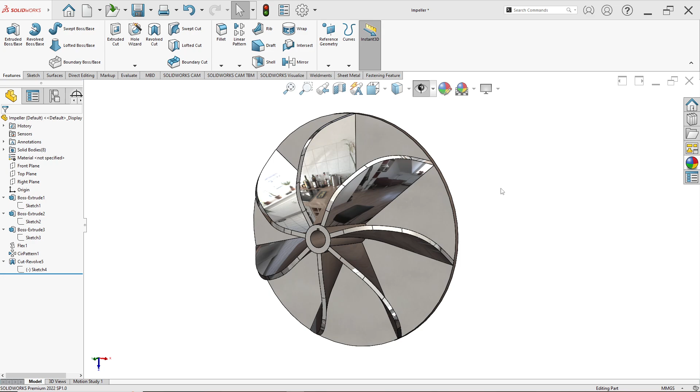In this tutorial we will learn how to design a centrifugal blade impeller like this in SolidWorks. Okay, you can see it like this.

First select here, click New and click Part, click OK. For background we can change plain white to a clear background, white. For unit, select millimeter gram second. After that we start from the top plane.

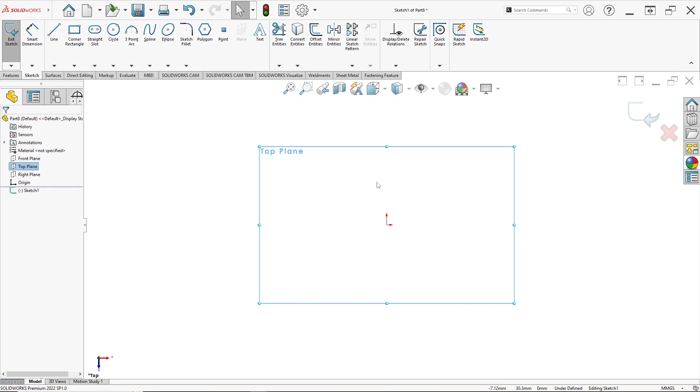Right click on top plane and click Sketch. First select a circle and draw it like this, then set the dimension for the circle. Here I set the diameter of the circle to 200 millimeter, for example.

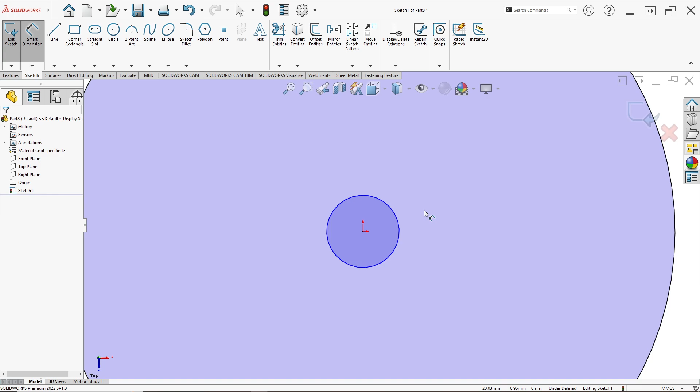Draw another circle in the center and set its dimension to 15 millimeter diameter. Then for the hub, draw a center rectangle from this point to this, with width set to 2 millimeter and distance to center of the part set to 9 millimeter.

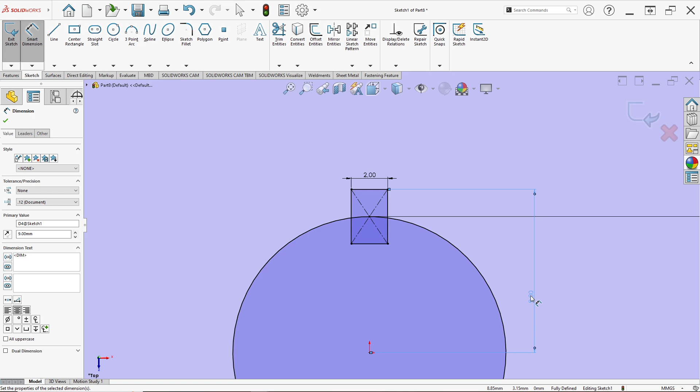It is like a keyway or hub. Just trim entities for this line, this line, this line, this line, and this line like this.

After that, click Feature and click Extrude Boss or Base like this. For direction select Blind, and for depth or thickness I set 4 millimeter like this.

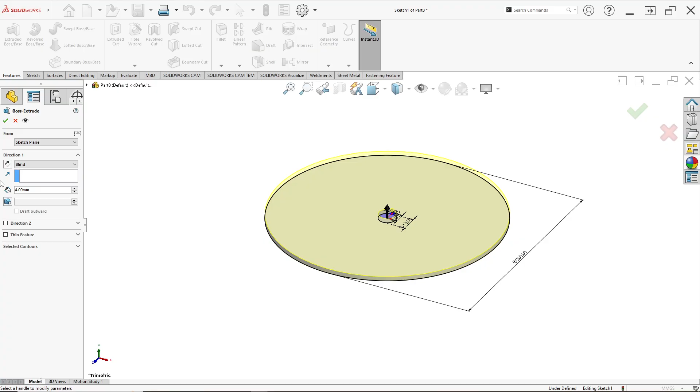Just click OK. After that, right click on this face and click Sketch, and convert entities. Click Convert Entities, and for entities to convert select this edge, this edge, this edge, and this edge.

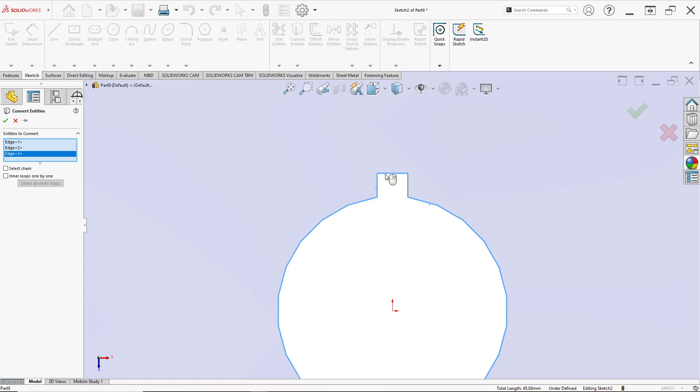Just click OK. After that, make a circle again, draw it like this, and set the dimension of the circle to 25 millimeter, for example.

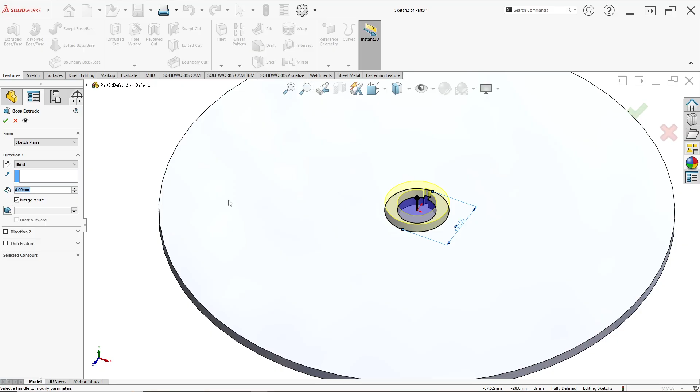After that, click Feature and click Extrude Boss. For depth or thickness here I set 60 millimeter, direction is Blind, so select Blind here and click OK.

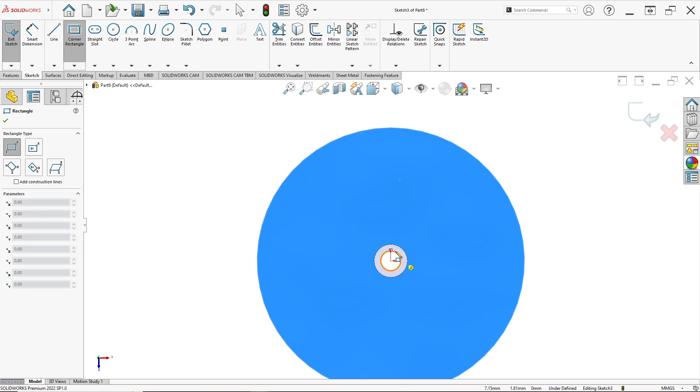It's simple. After that, right click again on this face and click Sketch. Here we start to draw a corner rectangle. Select Corner Rectangle and draw from this to this like that.

Ensure this midpoint and this point, hold Ctrl and click to make vertical like that, and set the width here. For example, I set it to 4 millimeter.

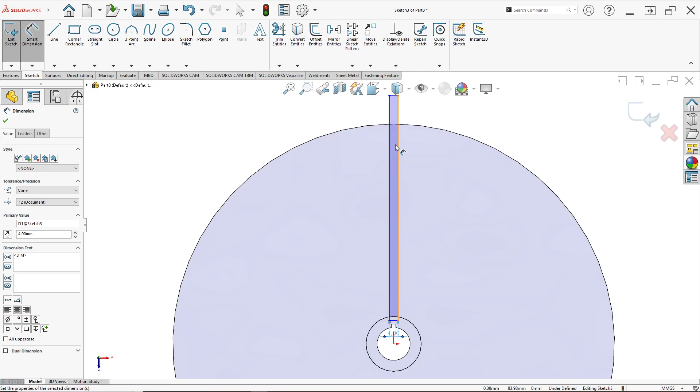Here we make a blade, with thickness set to 4 millimeter. For that, click Convert Entities again, and for entities to convert, click this edge and this edge.

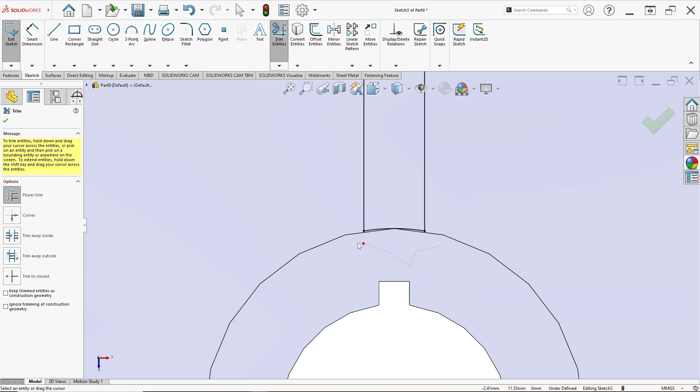Click OK, and then do Trim Entities for this line, this line, this line, and trim entities again for this line, this line, this line, and this line. Then from this point to this point, click Make Vertical again like that.

After that, click Feature and click Extrude Boss or Base again. For depth or thickness here it is the same, 60 millimeter, like this half.

But here we must uncheck Merge Result, because we want this blade to flex, twist, and bend after we make the boss extrude. So ensure you uncheck Merge Result like this.

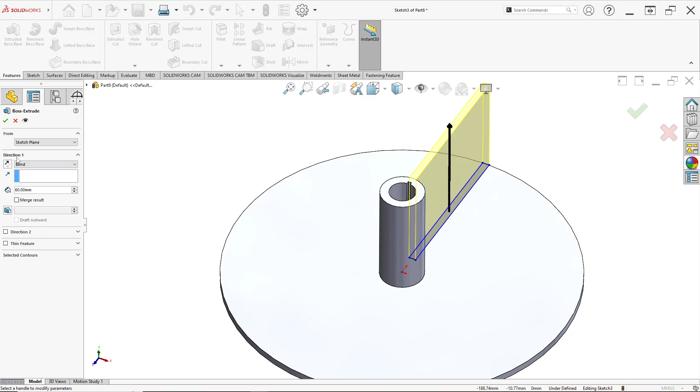For the bottom it is 60 millimeter, then just click OK. You can see it is simple like that.

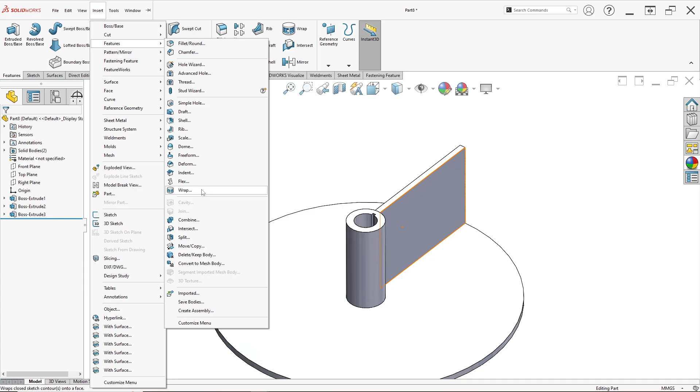After that, select here at top and click Insert and click Feature. Ensure you select Flex in the menu. For Flex input, click this Boss-Extrude3, this face, and automatically the defined item is Boss-Extrude3.

For bending here, for the triad in X, Y, and Z here. For rotational region, I set all to 0, like this, for example.

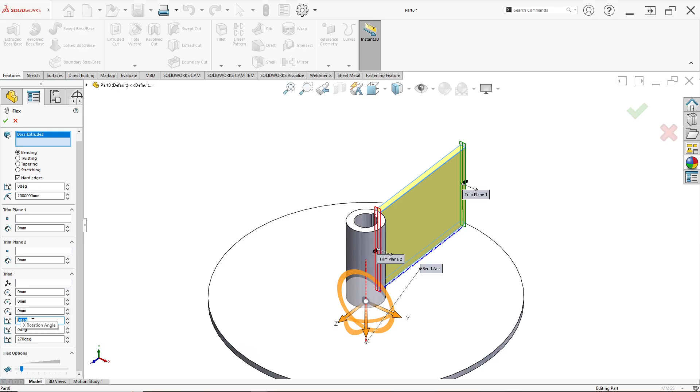For Z angle here, Z rotation angle I set to 270 degree, and in X direction rotation angle I set the same, 270 degree like this.

Then for the angle here we can change it. For example, here I set it to 45 degree like this.

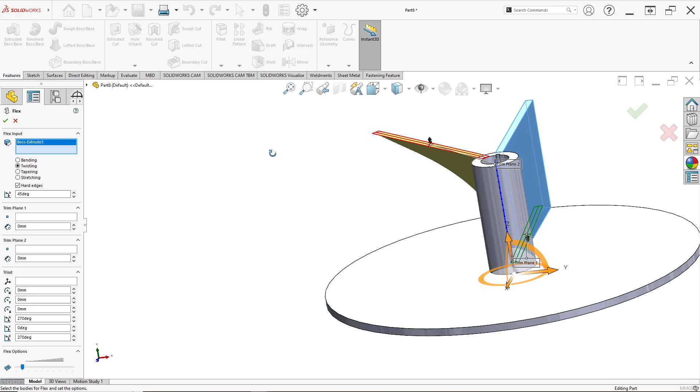Then after that, just click Twisting, 45 degree like the bending, like this. We can see the result after we click OK, in this preview.

After that just click OK and done like this. We just used the Flex feature to bend and twist this Boss-Extrude3 like this.

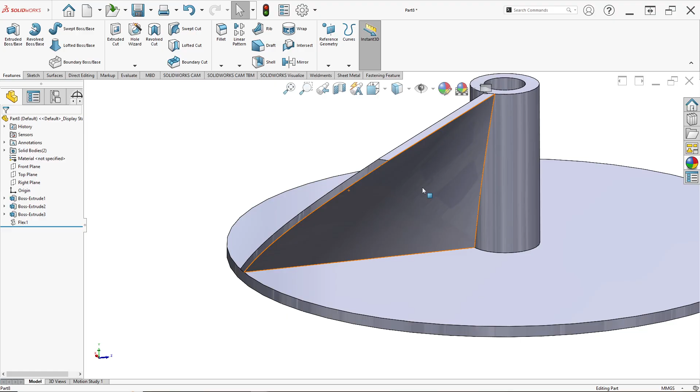So after we make a part or sketch like this, okay, we just click at the top here in Feature and click Circular Pattern.

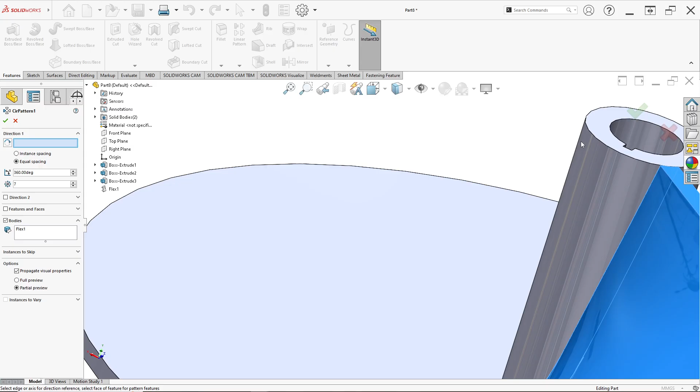Ensure to select Bodies, and for bodies select this or Flex 1. You can select this face or select Flex 1. For direction, you can click this edge. Ensure it is equal spacing, and for number of instances I set 7.

After that, just click OK and done like this. After we make the circular pattern like this, we click on front plane, right click on front plane and click Sketch.

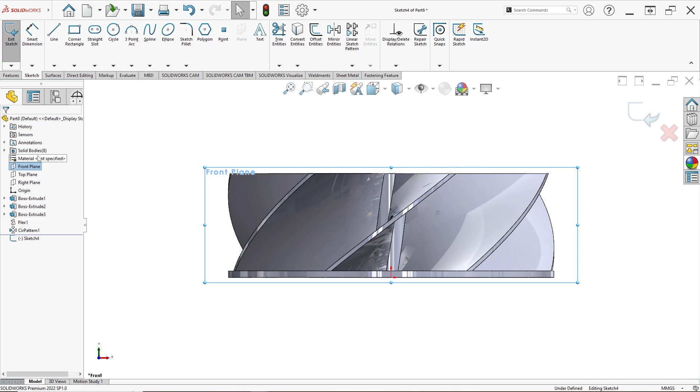We can draw a line from this midpoint to this point, draw line like this, draw line like this, and to this point, like this.

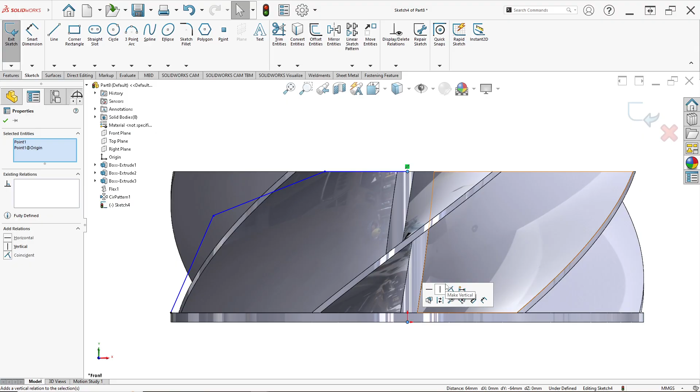Ensure this point and this center point, click Make Vertical. We can set the dimension, for example here I set 40 millimeter for the distance of this line.

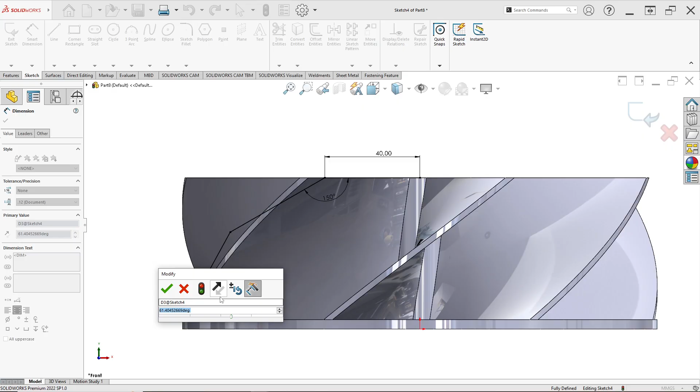And for the angle here I set 150 degree like this. And for this line and this edge I set the angle to 70 degree like this.

After that, just make a line here, draw from this point, this, draw, make this, and to this point like that.

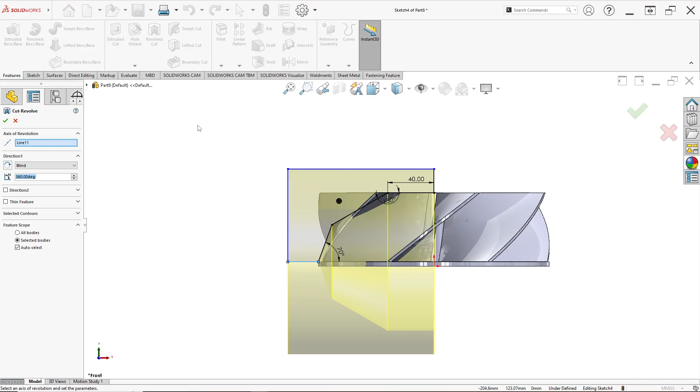And after that, just click Feature and click Revolve Cut here. For line, we can clear selection.

Here we can choose or click this line, and direction is Blind, and for angle 360 degree, and just click OK and done like this, symbol.

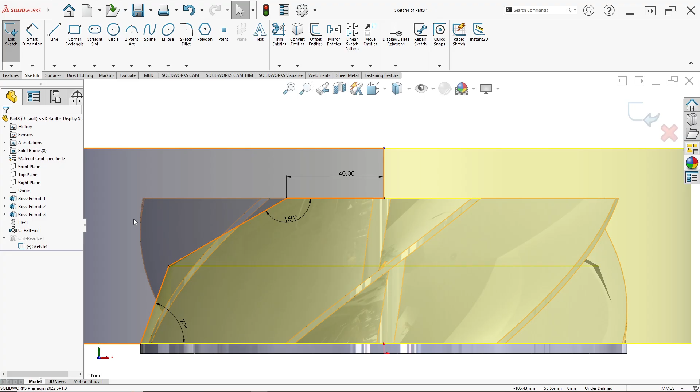Sorry, here we can click again for Sketch 4 and click Sketch. Here we can apply a fillet, click this point and this point.

Here I set the fillet radius to, for example, 50 millimeter. Just click OK and exit sketch, and this is the result like this.

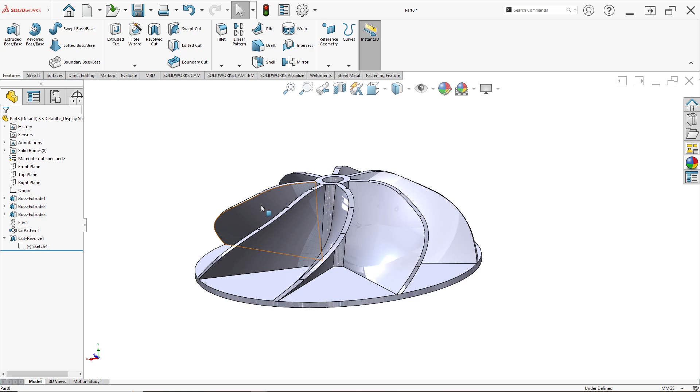Okay, this is simple. You can edit here in Sketch 4 if you want to change the direction for the fillet radius, and you can set the angle here.

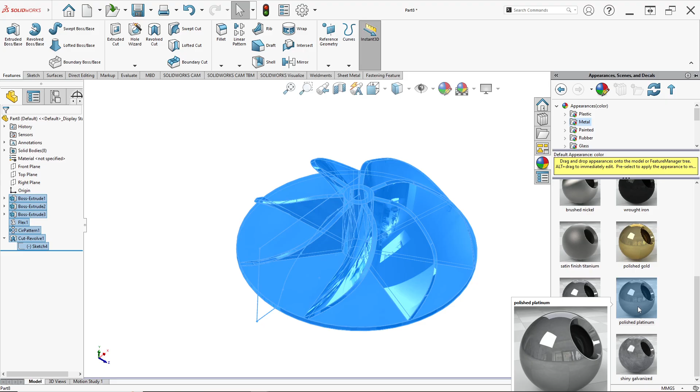Just click Exit Sketch. We can change appearances, select all features and click Appearances. For example I set it to Metal, and here I set Polished Platinum like this.